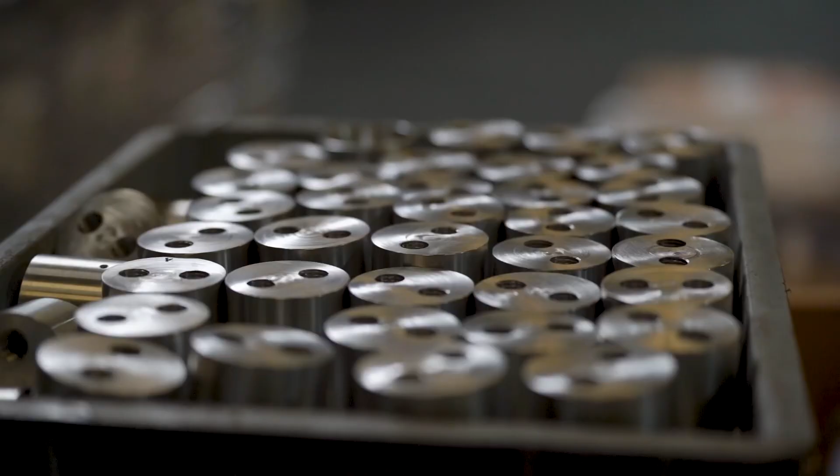Currently, the company has 87 employees, several of whom have been with the firm for 25 to 50 years, which demonstrates the team spirit we have built here.

The company manufactured Cirla bicycles for some decades, closing this production in 2011.

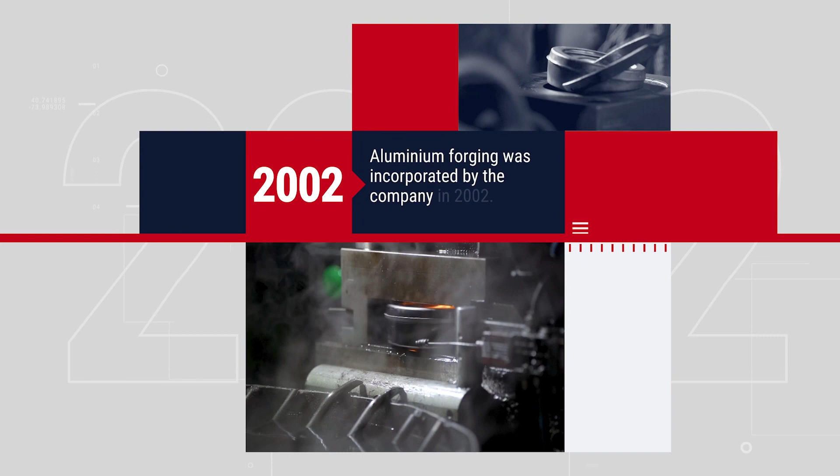At present, the principal technologies are aluminum forging through various mechanical forging presses for aluminum up to 1,000 tons. This technology was incorporated by the company in 2002 and results from a joint development with the University of Engineering of Porto.

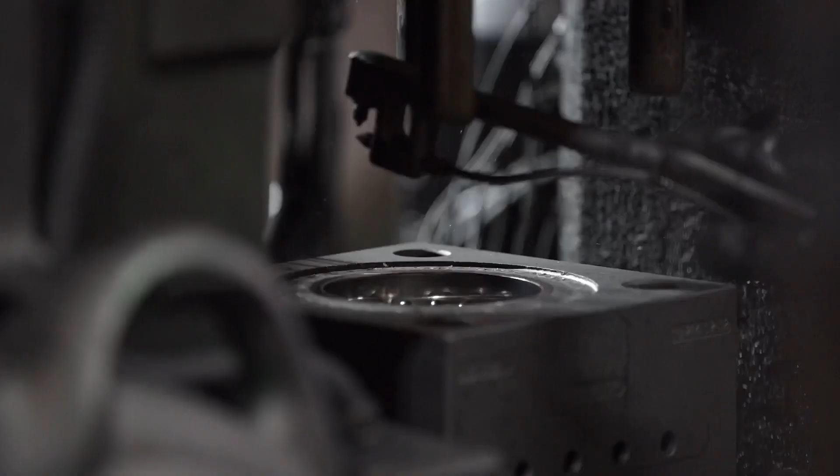and the Institute of Science and Innovation in Mechanical and Industrial Engineering. And this has been one of the firm's core technologies ever since.

The equipment is prepared to produce parts up to 1,500 grams. Turning high-precision machining by working with single and multi-spindle CNC turning centers, as well as multi-pallet machining centers working with aluminum and steel.

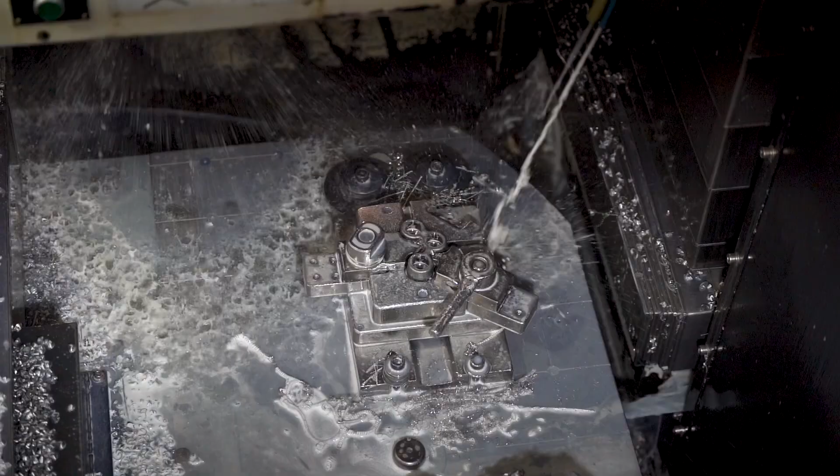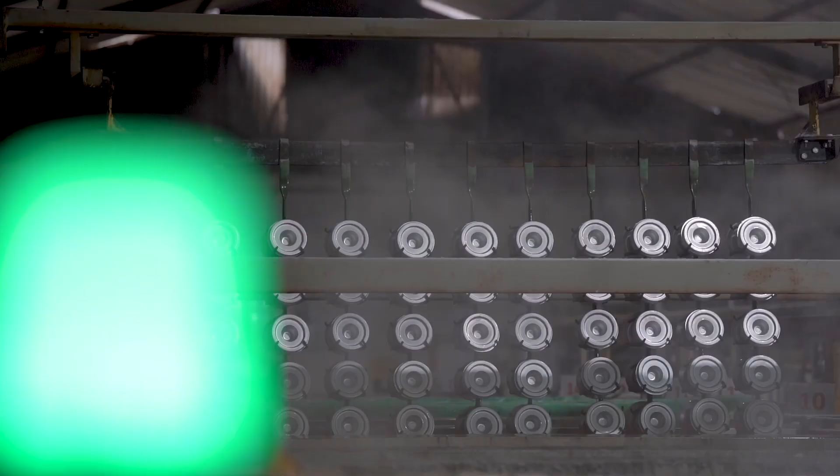Anodizing and zinc plating, being equipped with zinc plating and anodizing lines, processes that were automated in 2009. Many projects for the auto component industry received this treatment.

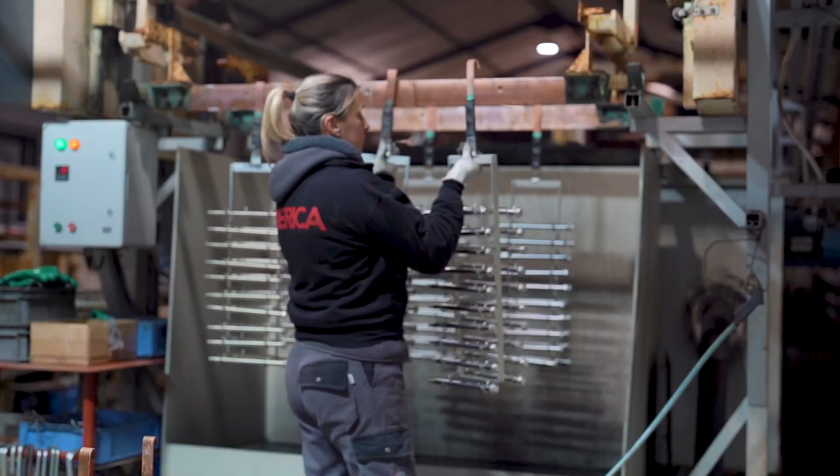The company has maintained certification by ISO 9001 since 1999, ISO TS Automotive since 2011, and IATF 16949 since 2016.

In 2023, Ibérica initiated the process to implement the Kaizen methodology through Kaizen Institute Portugal.

It is also a founding partner of Abimota, National Association of Two-Wheel Industries, the entity that carries out the European Union type approval for bicycles, e-bikes, and cargo e-bikes.

By obtaining ISO TS certification in 2011, the company opened up to major two-wheel automotive clients and has since been a Tier 1 supplier to highly prestigious brands with an extensive global presence.

After being a family company with Portuguese capital for several decades, in 2014, Ibérica Industry S.A. opened its share capital to an institutional shareholder, also Portuguese, enabling the company to capitalize and prepare for new opportunities.

Concerning automotive parts production, currently, Ibérica complements its provision of the two-wheel automotive sector with projects related to electric mobility, signing the first contracts to supply hybrid and full electric vehicles in 2017.

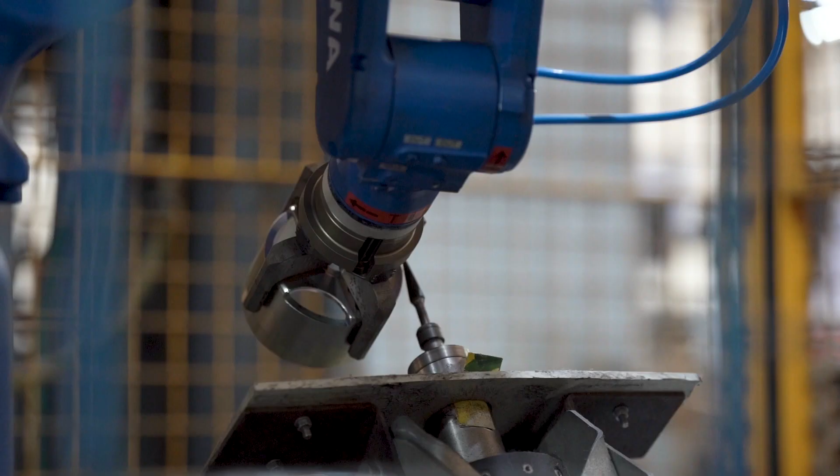The substitution of steel components for aluminum components in the sector was decisive to create this opportunity.

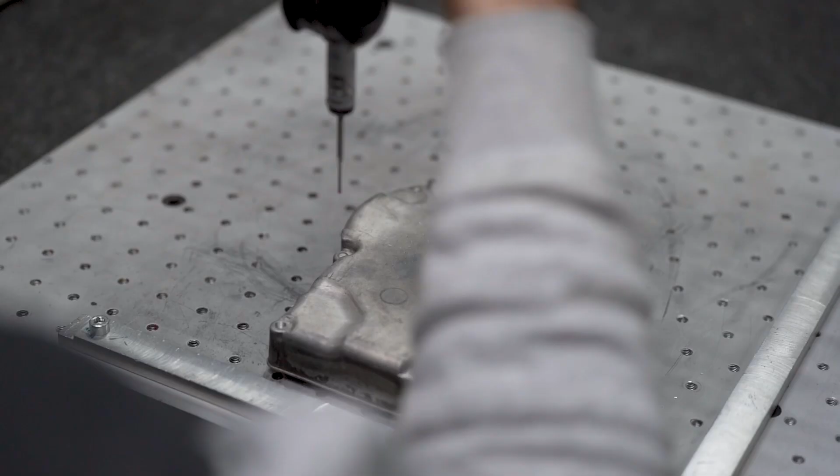The company's ability to work with clients in the development of manufacturing processes for new subsystems was a long journey, with annual quantities adapted to the size of the company at the time, which enabled us to gradually prepare for the production ramp-up.

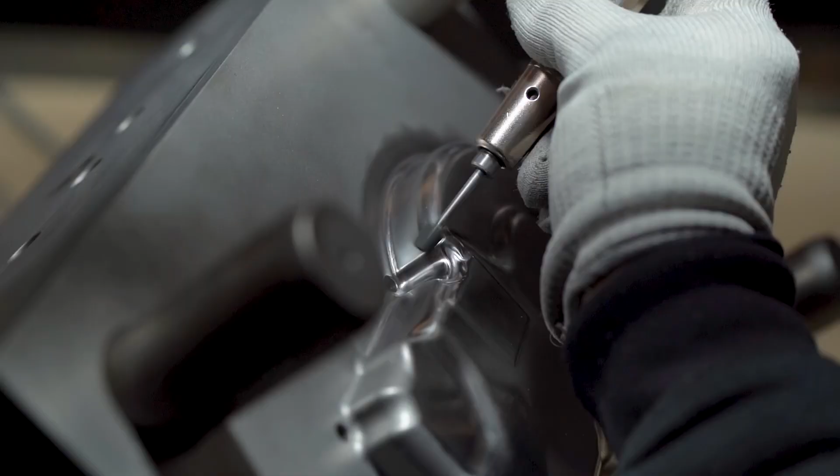Currently, the production of metal parts for electric and hybrid vehicles carries the same weight as the production of parts for the two-wheel automotive sector, and the annual production volumes are expected to keep increasing, based on contracts with maturities between 2028 and 2035.

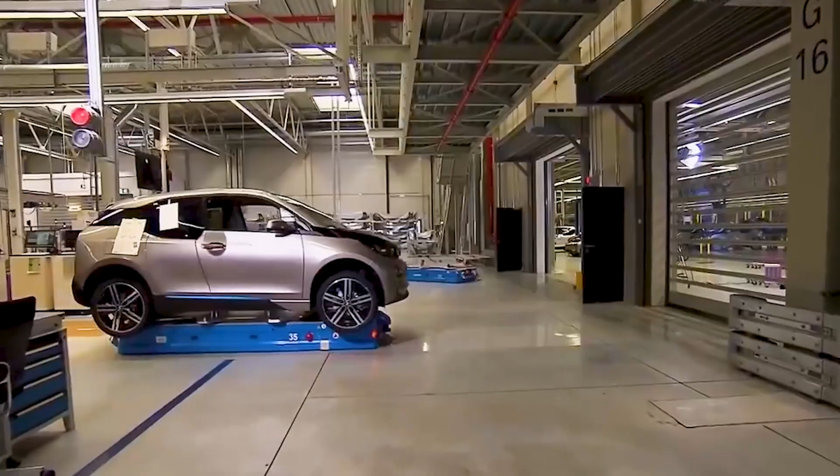Auto brands perform a quality audit on our industrial facilities every year, as we strive to find continuous improvements for the auto parts production process.

As far as LEV urban mobility is concerned, after closing down its bicycle production in 2011,

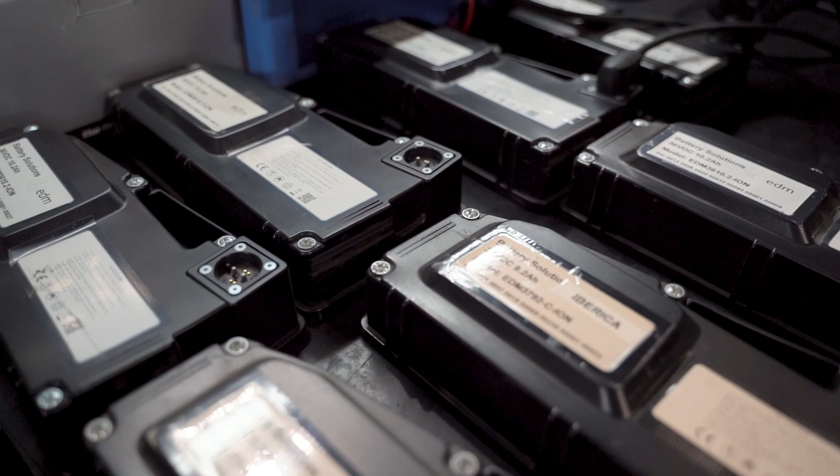Ibérica decided to relaunch this activity in 2016, manufacturing e-bike systems for bike-sharing operations for municipalities, universities, and also company fleets. Some examples of this are the system that combines conventional bicycles with e-bikes in Cascais, a city in the

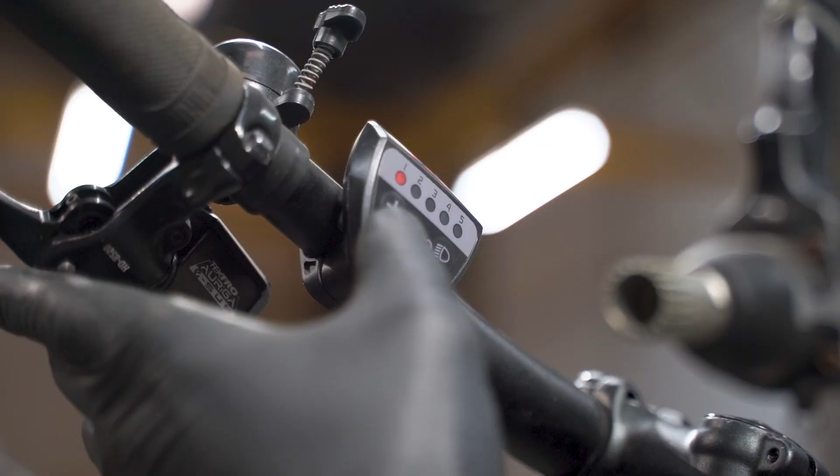Lisbon region, which was launched in June 2016, and also in Matosinhos, a city in the Porto metropolitan area. Both municipalities belong to the two largest urban regions in Portugal, respectively Lisbon and Porto.

Our e-bikes have also been operating at the University of Porto since 2018 in an operation subsidized by the European fund POSEUR, within the scope of the ongoing strategic decarbonization process.

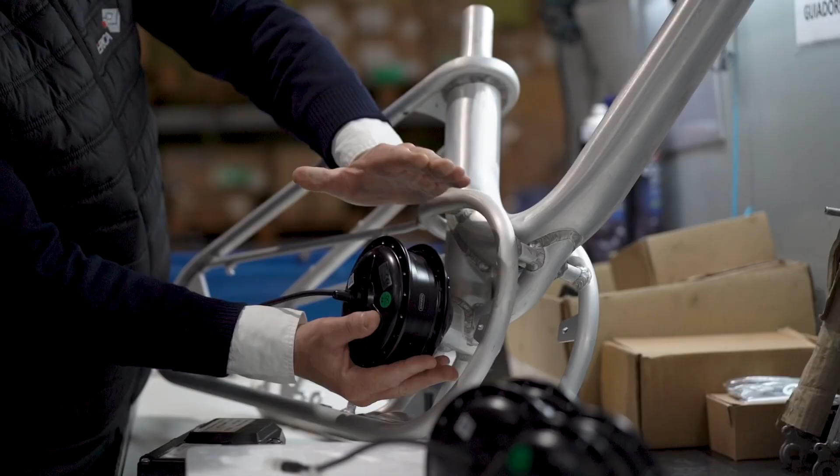In this operation, the one student, one e-bike, one semester relationship promoted the replacement of individual or collective combustion vehicles used to commute between the home and university with e-bikes.

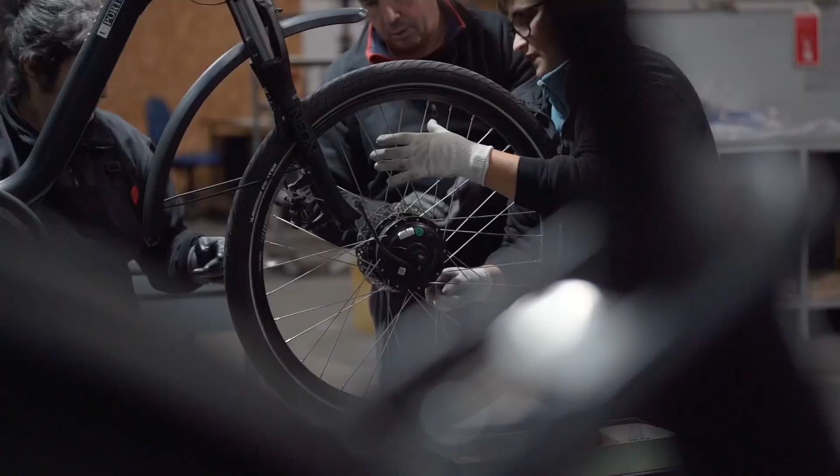We are also an active member of Portugal Bike Value, which brings together the leading national bicycle and e-bike manufacturers, whether it's our own brand or OEM, currently making Portugal the largest member of the European Union to produce these types of vehicles.

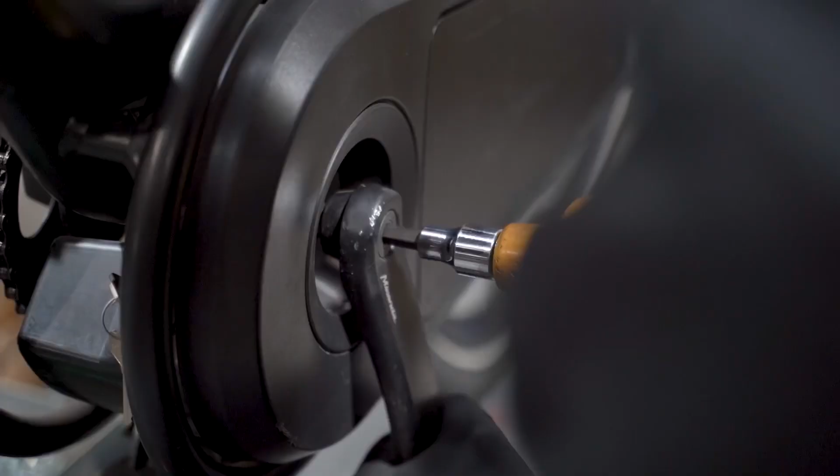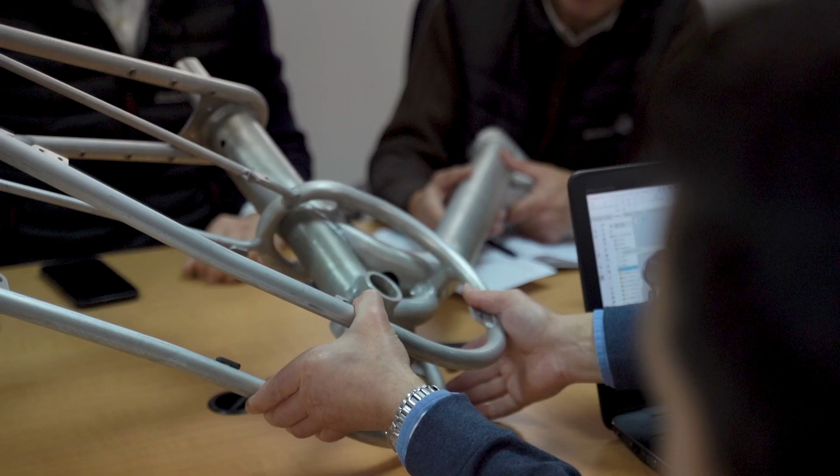That said, what is our current strategic view? Electric mobility in general and urban mobility with the adoption of soft transportation in city centers are two strategic vectors that, along with the reindustrialization process heavily promoted by the European Union, currently represent the basis of the company's strategic vision. In terms of electric mobility, the involvement of the auto parts supply chain with major brands in the four-wheel automotive sector is displaying major growth, based on the execution of various medium to long-term contracts with binding purchase orders until the 2028-2035 window.

The increase in the market share of hybrid and electric cars in Europe has been accelerating, and Ibérica is ready to accompany this growth.

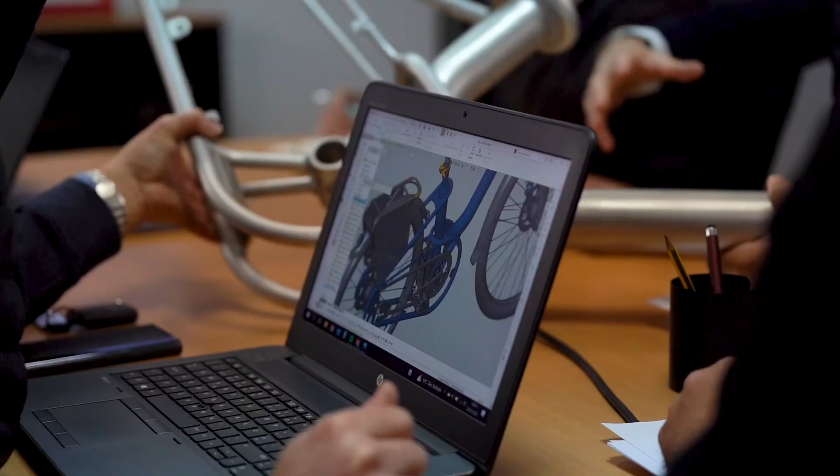Regarding the changes taking place in urban mobility in city centers and the adoption of light electric vehicles, LEV transportation, we have been developing e-bikes that satisfy the need for municipalities, businesses, and universities to provide solutions for the widespread adoption of these means of transport.

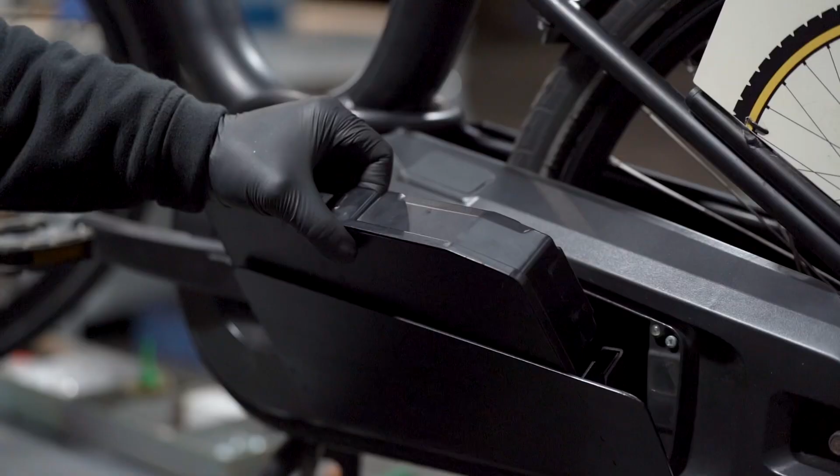Effectively implementing policies that promote and even exclusively demand the use of these modes of transportation in urban centers is crucial for the growth in sales of these products.

In line with the European directives for carbon-neutral mobility, Ibérica incorporated a consortium of major Portuguese and European companies, the Be Neutral program.

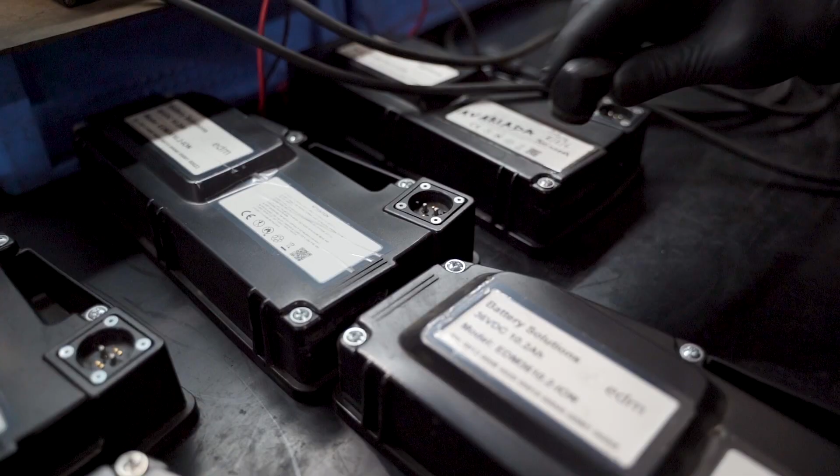This consortium is developed through the implementation of a 5G communications platform that touches on three vectors, which have as a common goal the development and industrial production of electric vehicles and their parts.

The first vector is for the development of a compact and semi-autonomous city e-bus, which will be led by Toyota Portugal and Salvador Caetano. The second vector regards the development of a compact e-car for car-sharing operations and is led by TMG Automotive, Simoldes Plastics, and CEiiA.

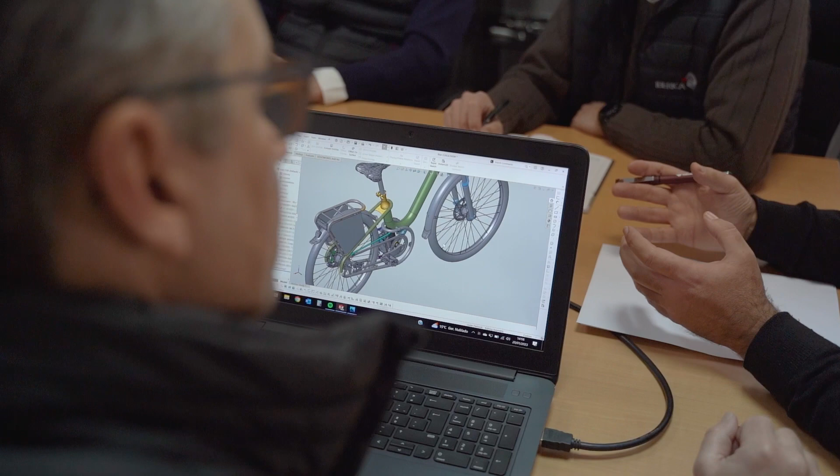The third vector is led by Ibérica and will develop a 2.0 version of the e-bike system that the company already carries, as well as a modular cargo e-bike. This program was launched with the Portuguese Ministry of Economy and involves a total investment of 287 million euros.

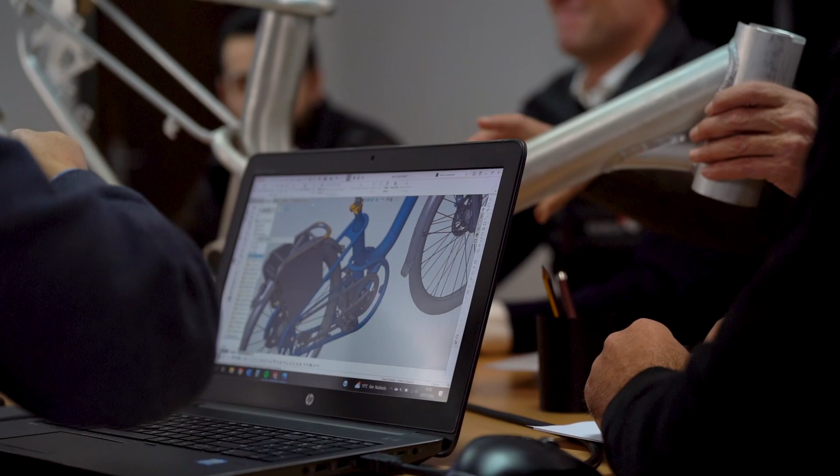With all this in mind, let's see how Yamaha MBK has been related to Ibérica since our first project in 1991. We have been supplying Yamaha MBK in France, Italy, the Netherlands, and Spain for more than 3 decades now. During this period, we have supplied Yamaha with more than 100 references, and we are extremely proud to be worthy of this trust and are deeply grateful for deserving the opportunity.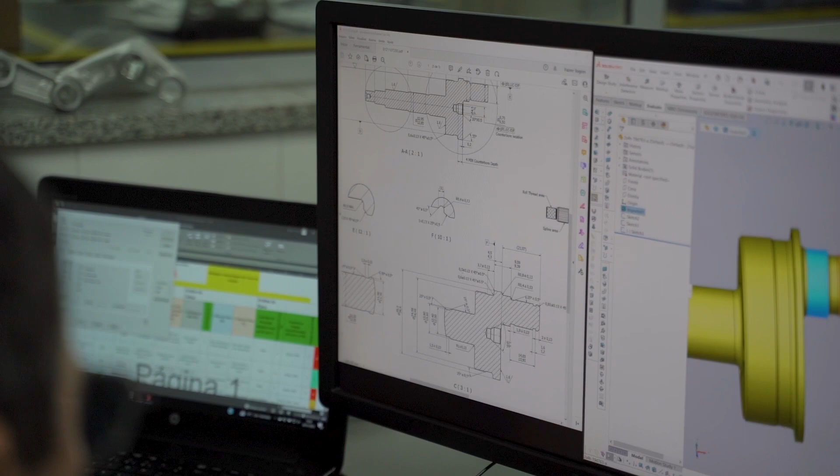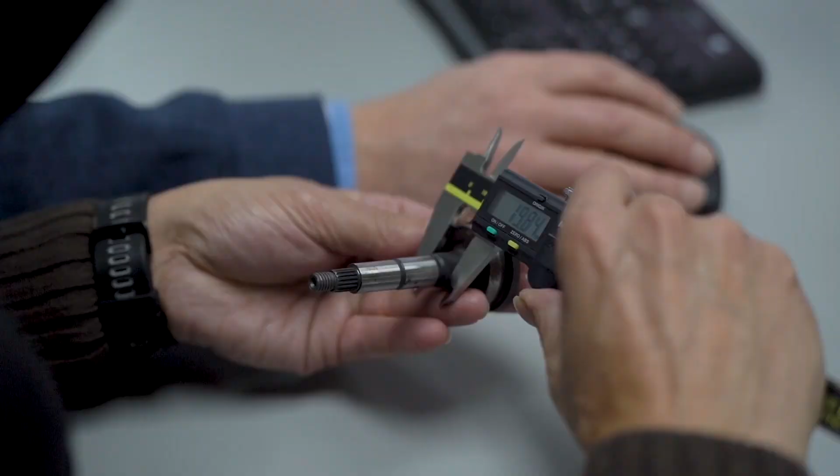Over this time, as the historical data shows, for us, Yamaha MBK has become a client with considerable financial presence, but above all, with a great strategic presence. Because as one of the world's leading brands in the two-wheel sector, every project you have challenged us with has enabled us to build our knowledge and skills.

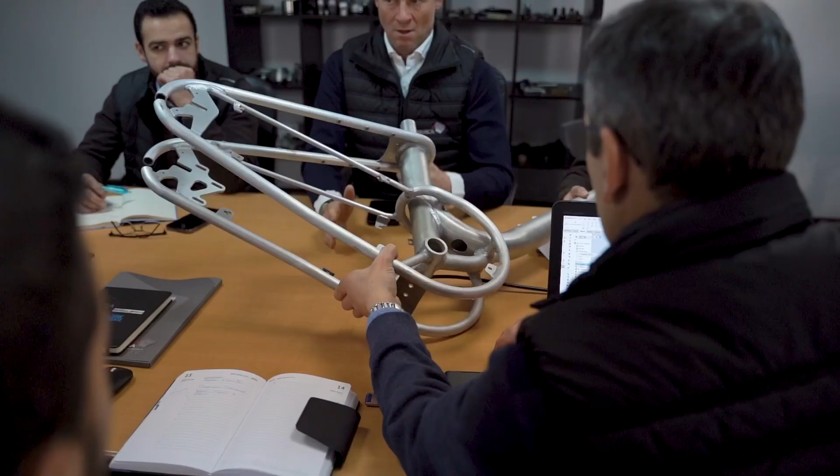We are currently supplying Yamaha MBK France with 8 references and maintain a close relationship with the company, always eager to embrace new opportunities and new paths presented by Yamaha, such as the Beat project.

If we consider Yamaha's strategic vision for Europe regarding the European e-bike market until 2025 and 2030, we believe that at this moment there are two vectors where we can contribute as a Yamaha partner, supplier, and customer.

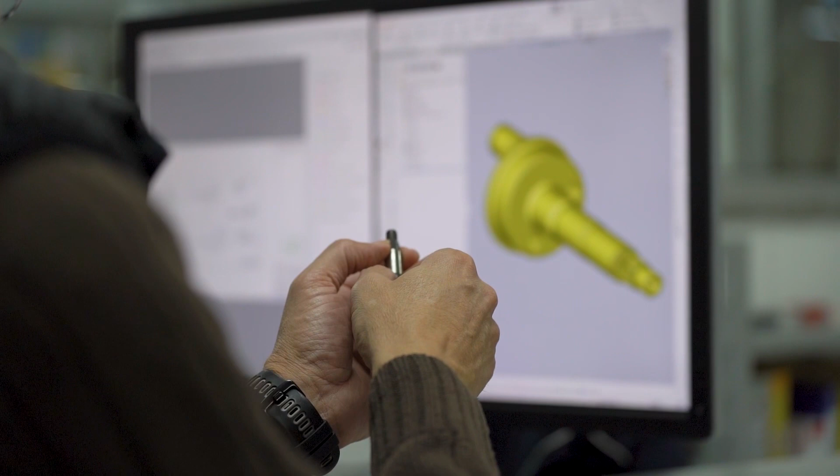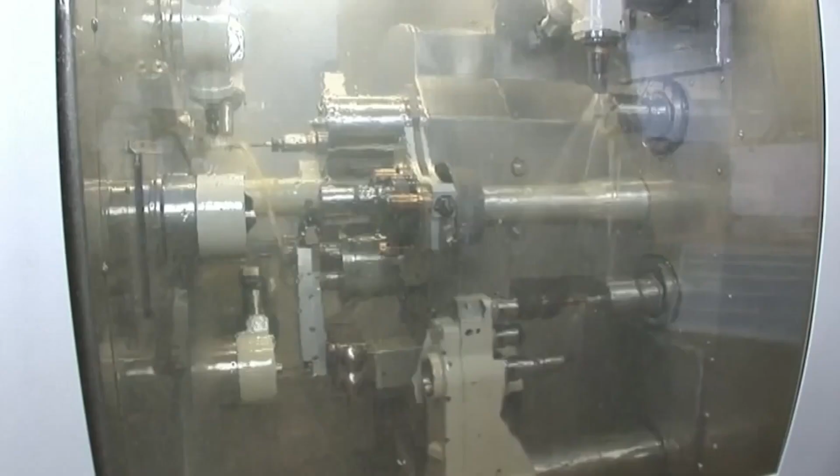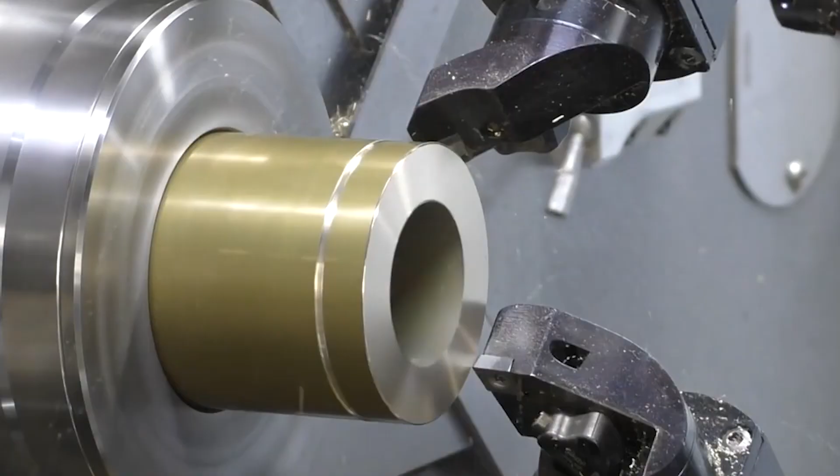The first is Beat Project Parts industrial production. Our projects, B Neutral and AM2R, approved within the scope of the EU Recovery Plan, funded by the European Commission through the Portuguese Ministry of Economy, define as strategic any project related to the supply chain for electric mobility or soft mobility, where we benefit from a significant subvention for all productive investment requested to attract new industrial production projects to the European Union.

The 6 references that we have quoted for the BEAT project are in line with this. Ibérica has extensive experience in various precision machining technologies, namely shafts for the automotive sector.

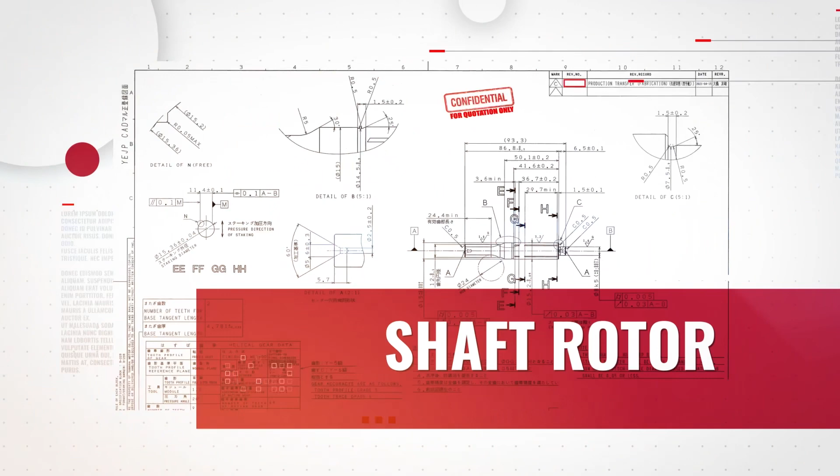An analysis of the references we have been asked to quote confirms that we are fully capable of producing 6 references: Axle main, gear middle drive, shaft rotor, gear idler, one-way clutch, and gear driven.

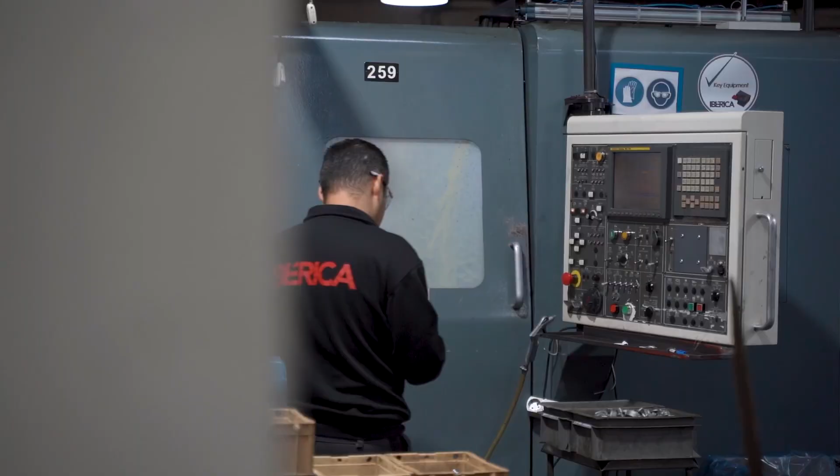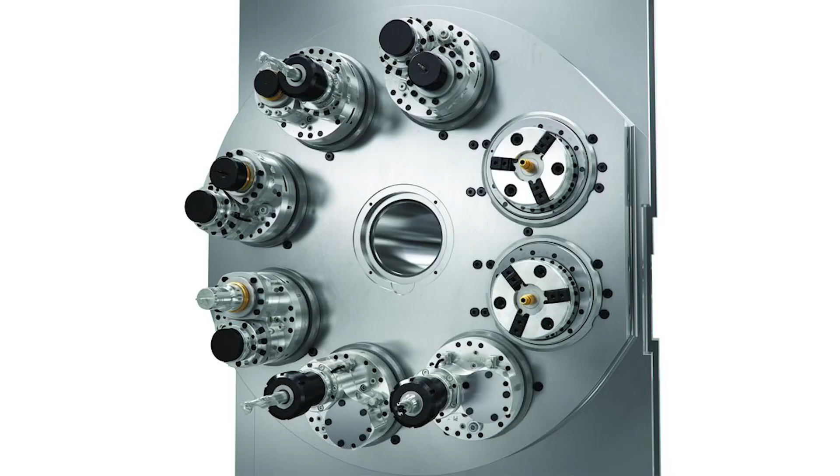In addition to the installed capacity we already have, we have at present defined all the additional equipment needed, resulting from a market search of the most reliable and efficient solutions guaranteed to fully meet the required specifications. The solutions found involve the complete machining of parts using an 8-spindle lathe of the Schütte brand.

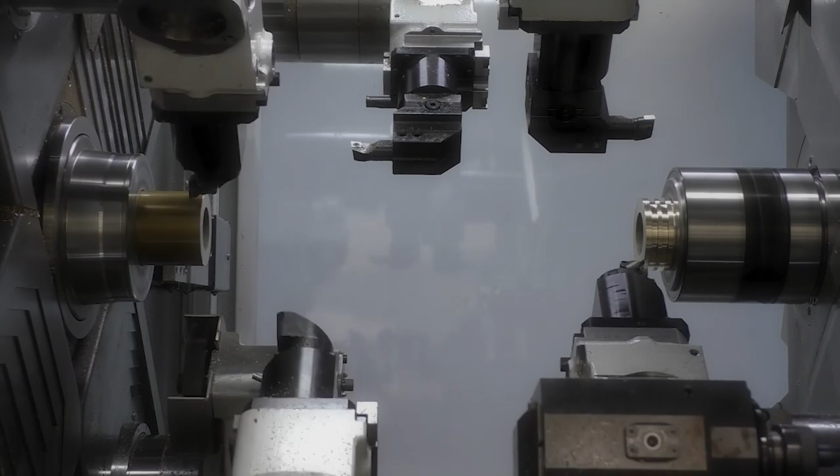This is the equipment currently applied to produce similar parts of other approved brands of European-produced e-bike motors. The heat treatment will be outsourced to one of the 2 local partners Ibérica has been working with for these types of services. The grinding operation and demagnetization will be executed internally using equipment 100% dedicated to this and other BEAT project references.

We have identified 2 credible partners for the DLC process. However, we count on Yamaha MBK to help identify a European alternative for ox polish. Regarding the gear idler, this part's specification calls for complete machining, but using a single spindle of the Schütte brand.

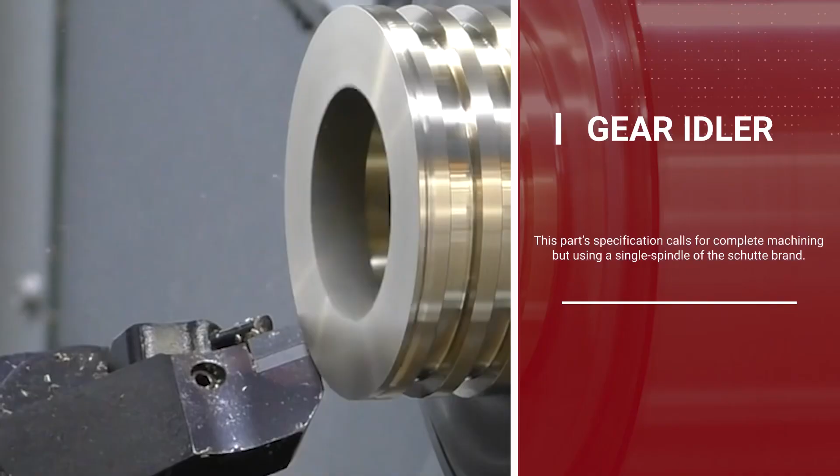For the one-way clutch comp, the Boss one-way inner component will be produced from a precision extrusion profile with an outline similar to the final outer contour. Machining will be combined between the lathe and the machining center, ending with the brushing operation.

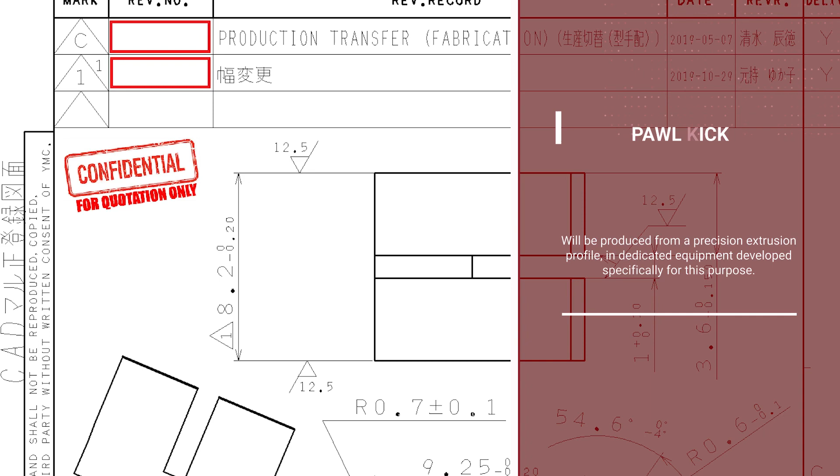The pawl kick component will be produced from a precision extrusion profile in dedicated equipment developed specifically for this purpose. The final clutch assy assembly will consist of assembling the 2 previous components by means of the spring pawl, which will be outsourced to an external party, followed by demagnetization.

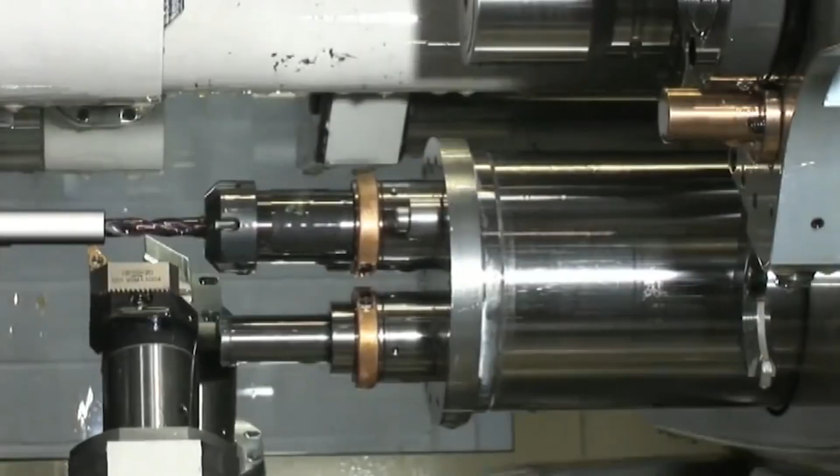Regarding the gear driven, the Boss insert component will be produced in a CNC lathe. The final reference will be executed using POM injection molding and processed by one of our 2 usual partners for this type of service. We consider using returnable packaging for logistical and environmental efficiency.

Ibérica wishes to create a dedicated unit to produce these 6 references through implementation of the Kaizen methodology, and is already in contact with Kaizen Institute Portugal for this purpose.

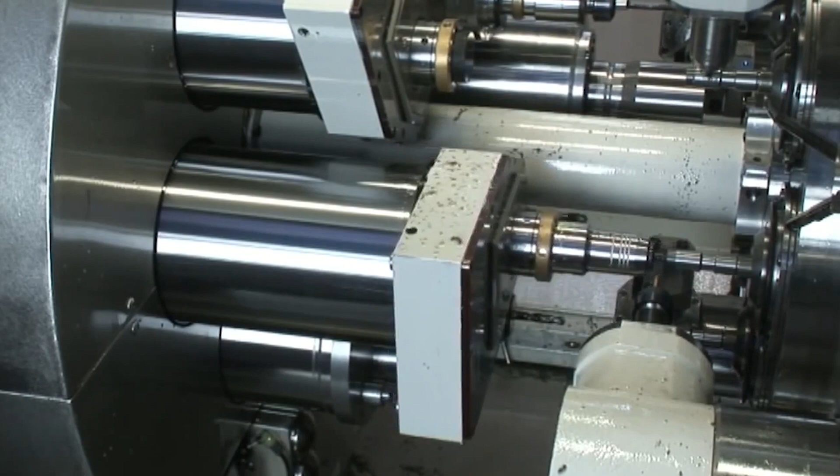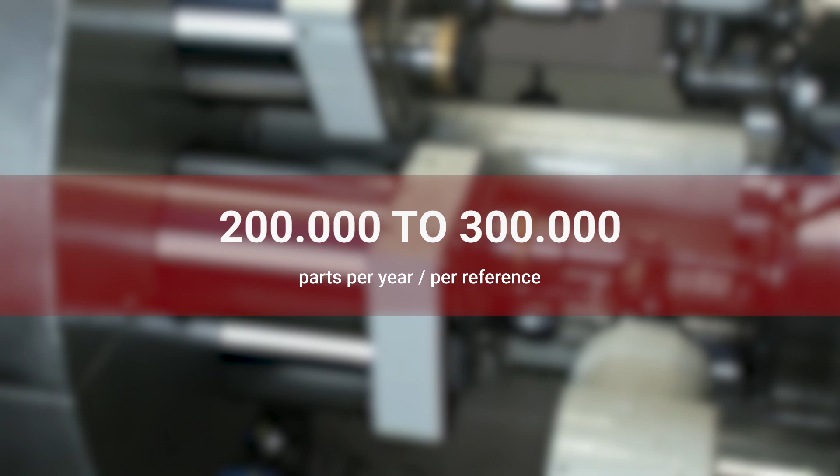The financial and economic capacity, as well as the industrial complexity required to produce these 6 components in the quantity specified by Yamaha MBK, of 200,000 to 300,000 parts per year per reference, are fully guaranteed by Ibérica, should Yamaha MBK wish to entrust us with this project.

This will require a 12-month period for the development and full installation of the production capacity, according to the transition period for the European production of these components, which is scheduled for the end of 2024.

The second vector is Ibérica's e-bike and modular cargo e-bike development with a Yamaha powertrain solution. Currently, we will initiate the research and development process for an updated 2.0 version of our e-bikes. At this time, the decision has been made to adopt a central motor, as is the case with the motors that Yamaha provides for OEM e-bikes.

Ibérica is extremely interested in powering its e-bikes with Yamaha solutions, and we would like to build a close relationship with the sales and technical department of Yamaha e-bike motors to begin the joint work necessary to integrate them in our e-bikes as soon as possible.

This project is a key part of the recovery plan for Europe Be Neutral program and will have national exposure and the commercial ambition to supply the European market as a whole.

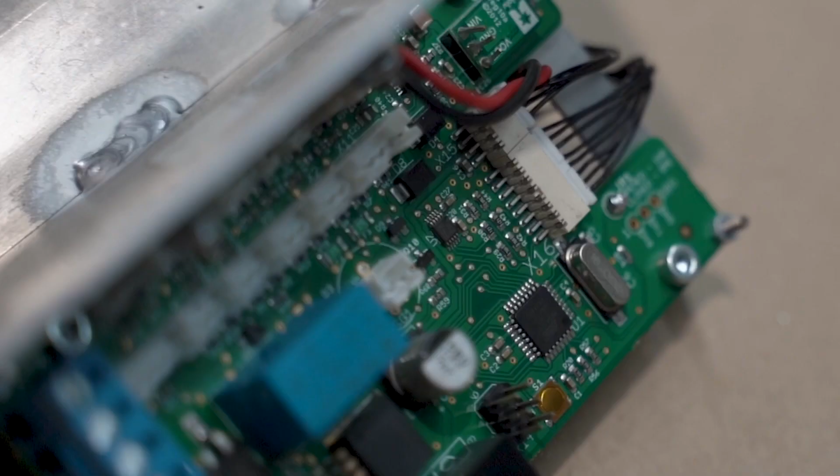The development of these models is part of the integrated and smart mobility solution conceived by the Be Neutral project. Therefore, e-bikes equipped with 5G connection to mobility service platforms will integrate e-bikes with public transport and city car sharing.

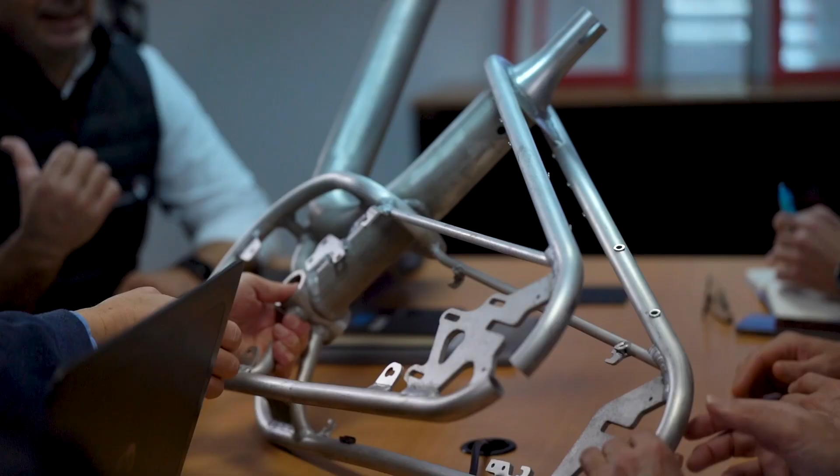Also included in the Be Neutral project is the development of a modular cargo e-bike, fitted with an ordinary chassis to accommodate a goods transport module for product delivery in city centers, a dedicated module to transport children, as well as an additional module for passenger transportation.

This part of the project will involve a group of logistics companies, for example, the Portuguese Postal Service, who will participate in the development of cargo e-bikes in order to adapt this product according to their usage needs.

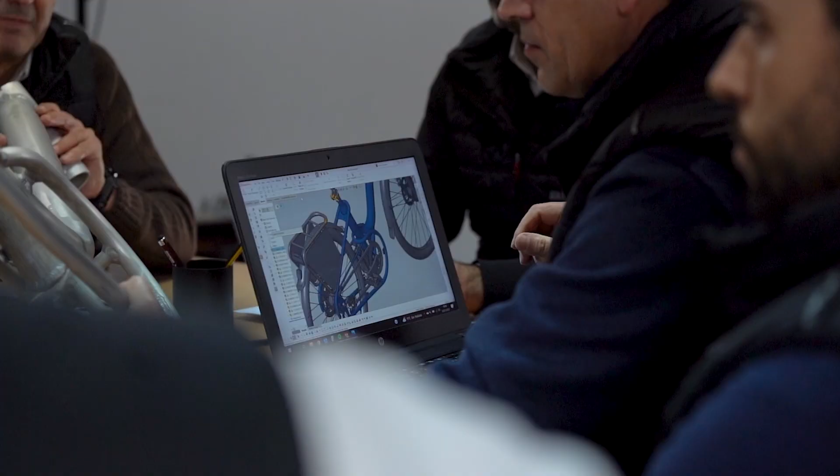Ibérica is looking for a full powertrain system that is suitable for cargo e-bikes and would like to work together with Yamaha MBK to find the best solution available.

We are fully available for any further information you may need, as well as to discuss any further subjects or any questions that you may have.